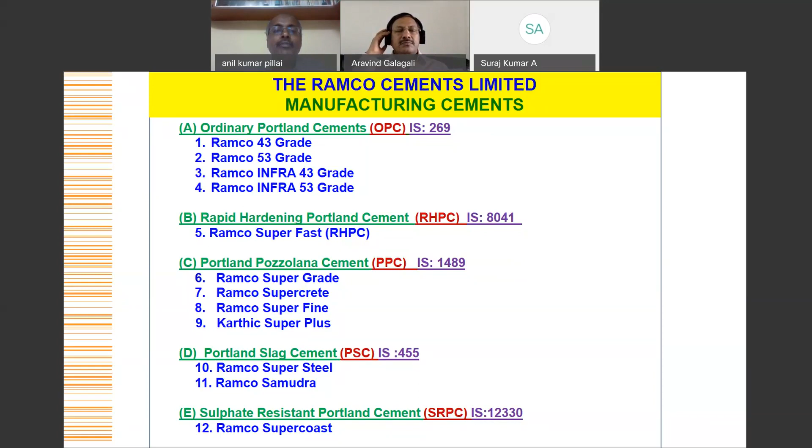So we do not recommend one type of cement alone. It is not that if we manufacture PPC or PSC, we just recommend that type of cement - it is not like that. It is based on the requirement of concrete that we recommend cement, and that is very important, because that needs to be followed from an engineering perspective as well. So these are the various brands of cement which I had already mentioned, the 12 varieties of cement.

And we also have the dry mix range of products for non-structural applications. If you want to fix tiles, we have the tile fix, the block fix, the super plaster, the super fine, and the tile grout.

So these are the dry mix products which are coming from our dry mix plant, established in collaboration with MTech Germany. Now, to understand customer requirements from an engineering perspective, it is very important that we have a research center. So we have Ramco Research and Development Center, where we have various equipment for checking the durability, the strength, and various fine parameters of cement as well as concrete.

We have the mercury intrusion porosimeter, the X-ray diffractometer, which are useful from a research point of view. So many colleges and prestigious institutions who want a second opinion about concrete and cement come to us and ask for studies to be done on those samples. So this is one thing we have been able to do at Ramco Research Development Center.

The organization has been able to get the 4 Leaves Award for leadership in technology and environmental practices. Some of our customers include ITD Cementation, L&T, Haldia Cement Authority, Haldia Development Authority, metro projects - our cement is approved for these.

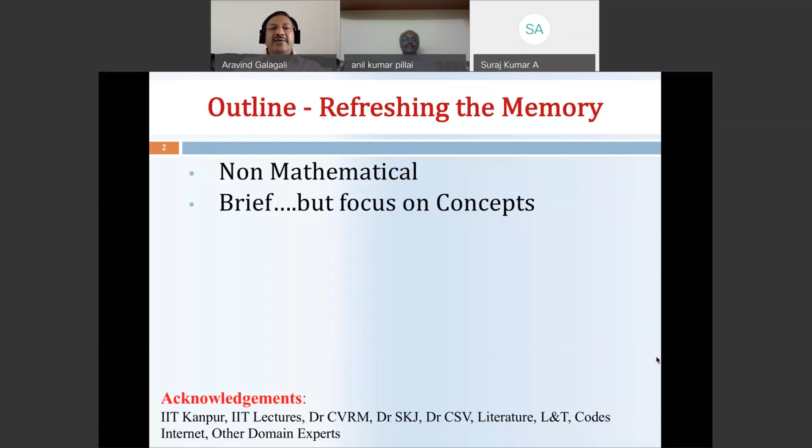But in the process, I would not fail to touch upon the very important concepts which you need to take forward in your day-to-day life, as well as in your consultancy projects, designing buildings and infrastructure projects. So I'll touch briefly on the concepts which have led to structural failures - this will be useful for students and consulting engineers practicing in the field. My focus will be on highlighting these concepts, and we'll try to understand why structures fail, what the reasons are, and if they are failing, who is responsible, and how much each one is responsible for the failure of the structures.

And if it's not within our purview, then probably we don't have to really be bothered about it. But by the time we reach the end of the lecture, you would know who is responsible and to what extent one is responsible in the entire domain of structural engineering. So in a couple of slides at the end, I'll touch upon the learnings we should take away in understanding structural failures.

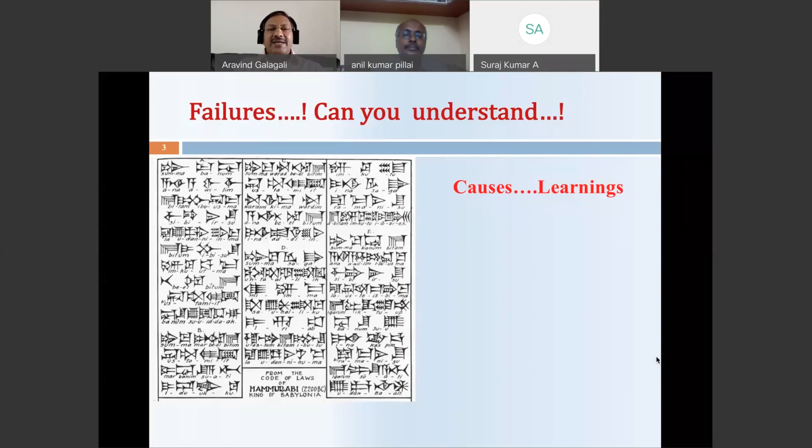So this is how the understanding of the failure is - is it like blind people touching the elephant, or can we truly understand, which will become more clear once we go to the following slides, whether the structures and the failures are understandable.

And if yes, how do you understand, and how do you learn after understanding the reasons for these failures? Once we talk about failure, I'd like to refresh your memory about the famous definition. Failure is not exactly what you think - a total collapse of the structure down to the ground. It is not always true that failure means a complete collapse.

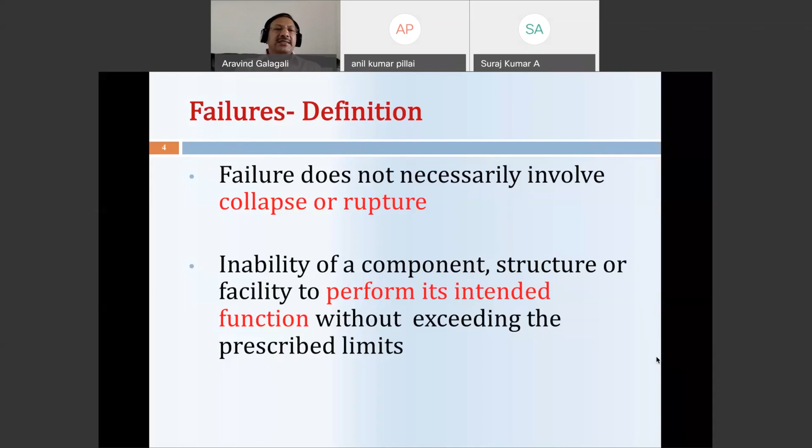Now, to learn from failures, let us quickly look through some past failures in history. Unless we look back, we will not be able to learn from the past. These are some failures available in the public domain, and I'm highlighting the reasons to bring to your attention - how structures fail, where we failed to learn from them, and how those failures can be technically interpreted.

Let us see the famous failures. I've taken these not in chronological order - earlier ones or later ones - it's just a combination of some historic failures.

One of the earliest failures, still popular today, is the Leaning Tower of Pisa, constructed in 1173. That was one of the first failures that engineers in the field understood. The total height of the structure is 60 meters, diameter approximately 20 meters, and it is tilted right now by 5.5 degrees, with the inclination increasing every year by a fraction of a millimeter. Field engineers, geotechnical and structural engineers are still trying to understand the reason and how to arrest this failure.

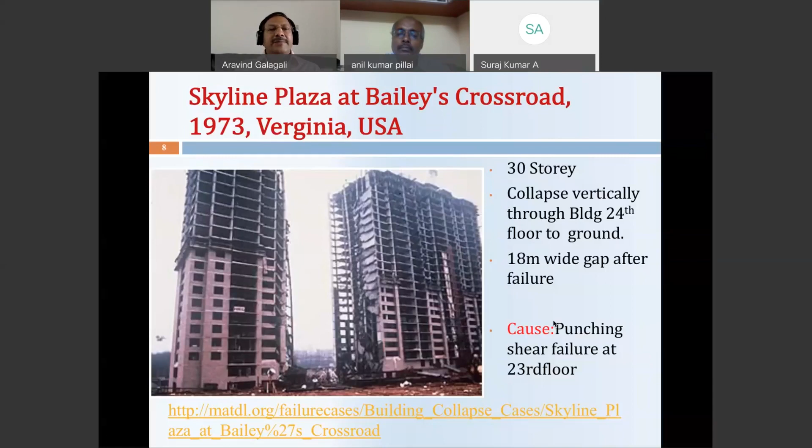These figures and failures bring to your notice how a structure can fail, and what are the different modes in which a structure can fail. What we learn from this is most important.

The other thing we learn in engineering is that large masses should not be at the top of the building. It is not that it absolutely should not be—I want to tell all the listeners, practicing engineers, and particularly students, once you see these failures and I say large masses should not be at the top, you should not get me wrong.

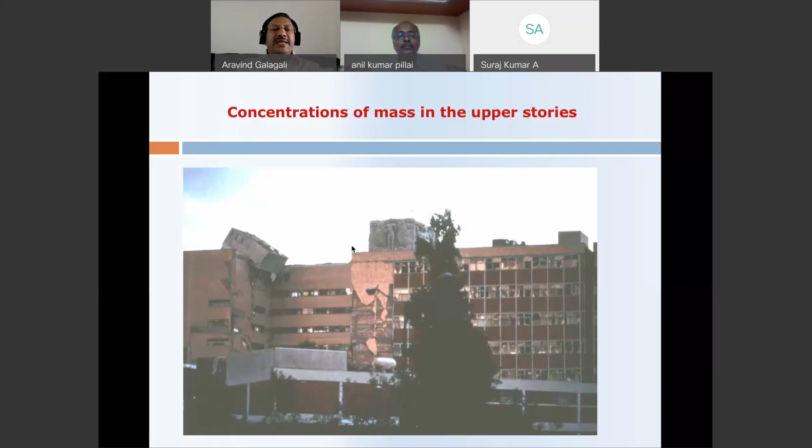So once you do design, you should be very careful in projecting such heavy masses at the rooftops. You could see some of the things which were failing on the ground, but even structures within the water are also failing.

Now, in the 19th century, there was a very important bridge failure—the Tay Bridge failure—and a lot of learnings happened from this bridge failure, which was completed in 1878, though it started about a decade earlier. There were 85 simply supported spans.

The failure occurred when there was a huge storm, and the structure collapsed. That triggered important thinking in the engineering domain—that there was an underestimation of the wind load. The cause of the failure was identified as the underestimation of wind load. So wind led to this failure, and people started working very aggressively on how a structure can be designed under wind loads.

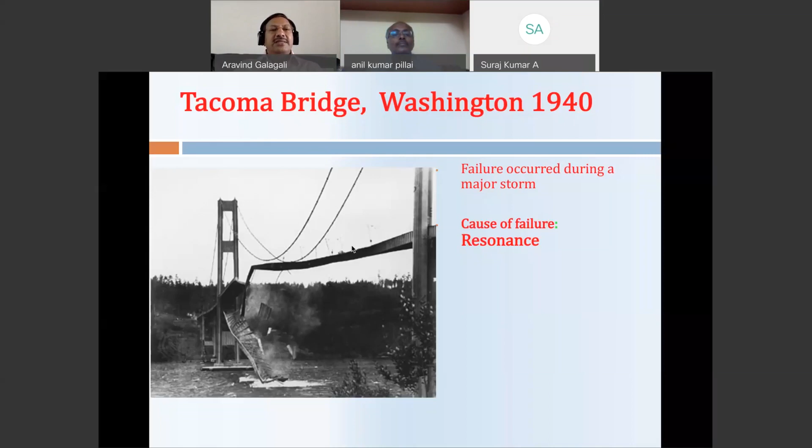One interesting thing is that a photographer was doing photography there, and when the structure started vibrating he could focus his attention and capture video, which has given important inputs for structural engineers to understand the behavior of bridges under dynamic loading and the reasons for resonance. So this is what triggered the thinking process in 1940 through the failure of the Tacoma Narrows Bridge.

Imagine, these days there are a lot of shelters during construction, and workers stay just below the construction site. If something like this happens, it leads to devastation and the killing of a lot of people. So you should be very careful in designing infrastructure projects when they experience dynamic loads.

This is one of the failures in India at Panaji. Some of you from Goa can recognize this is on the Mandavi river, and surprisingly this bridge collapsed three times. Once it collapsed, they redid it, then a second time, a third time, and finally they built it properly into a safe structure. But what you need to understand is how the failure happened here.

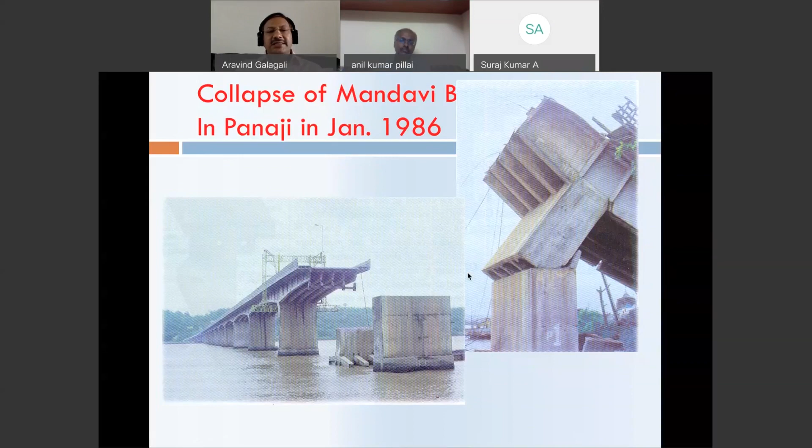The superstructure totally collapsed and fell into the Mandavi River. This is another view of the pier failure, the superstructure failure. The point to note is the repetition of failures at the same site. Why did this happen, what are the reasons, and what did we learn?

Probably all of you are aware of this picture from Shanghai, a building that failed in 2009. I'm showing this for completeness, because the failure of a structure is not only connected to structural engineering, it also has something to do with geotechnical engineering. This is a peculiar failure due to inadequate understanding of the soil and inadequate design of the foundation.

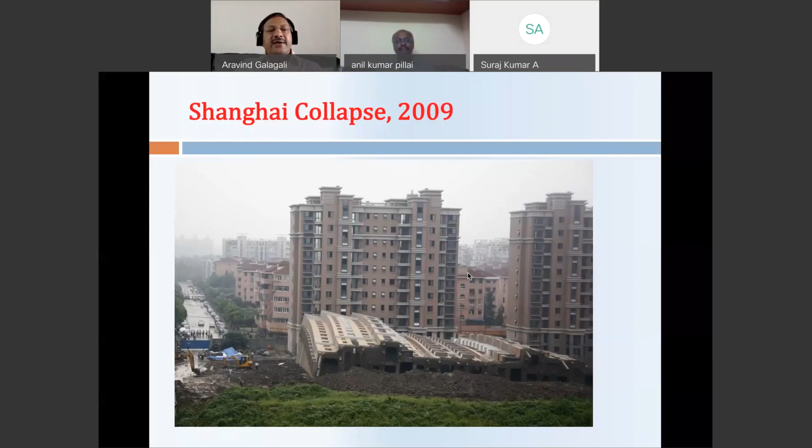In spite of going for deep foundations like piles, they came off like this. A lot of learning happened after this 2009 failure, about the reasons, the site effect on the design of the structure, and how such buildings behave under lateral loads.

Why I'm showing you all this is, later in a few slides, you would understand the reason. This is a soft lower floor collapse. You would see what that soft story is. It may be a known thing for people of high academic repute and experienced practicing engineers, but for the sake of students and practicing engineers, you can understand what a soft story is and how a structure can collapse.

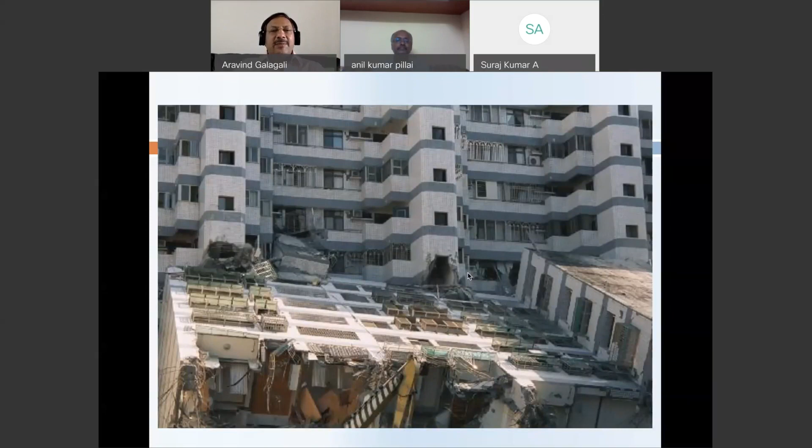This is another failure of a building. You can see the other portion which was standing intact, while only the front portion is failing. What you need to understand is, don't be under the impression that all structures tend to fail. No, some are failing, some are not failing, and you would understand the reasons and who is responsible.

This is, I'll quickly go through, the flyover failure at Hyderabad, which is a typical case of geotechnical failure. This is one view of the failure. Just see the picture, I'll quickly go through. This is a failure, and the top structure has also come down. You can see there is a tower during the centering portion. This is the portion which got collapsed, and this is a typical case of geotechnical failure, because you can see the pedestal.

Probably you must have seen in previous presentations also that it was resting partly - the supporting, the shuttering, or these things used for the superstructure, were resting on a pedestal. This pedestal was partly on filled soil and partly on strong soil, which led to the failure of the support structure, and because of that, the entire structure collapsed.

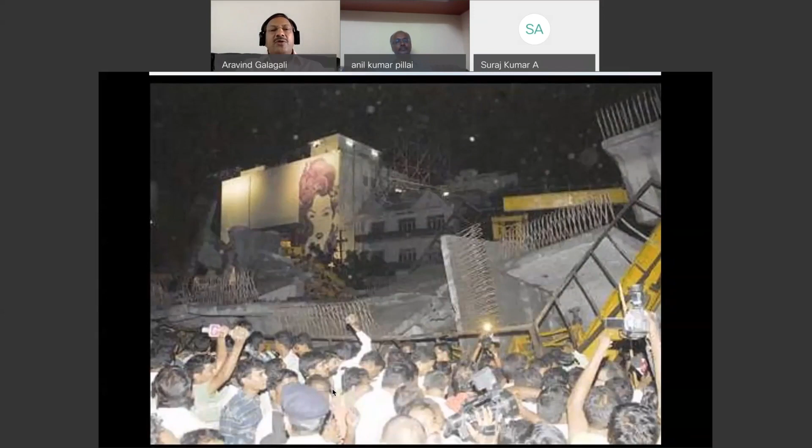There was a lot of hue and cry, and you can see a lot of people who got entrapped below the debris, and a lot of vehicles got entrapped between the failure of the centering and supports. This is what you must have seen on television. These are some of the pictures, and people died and were rushing to the hospital.

Why I'm showing you all this is just to bring to your notice that failure can be disastrous if we don't try to learn from past failures, and that's the reason why I'm showing you all these pictures. Some things also can be due to lack of supervision.

I'll just show a few structures. You can see again an important infrastructure project. You can see here, particularly the pedestal height - this pedestal height is different, there is a pedestal height is different, this is the pedestal height is different. Is it because of improper construction or improper supervision?

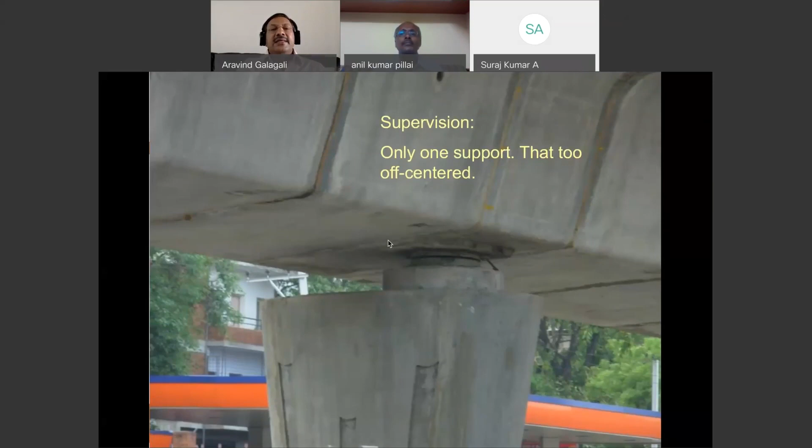More particularly, when an infrastructure project is built like this, can you afford to have negligence during construction? You can see here the missing support, another bearing and another pedestal coming on the other side, and the entire structure is supported eccentrically, which is highly vulnerable for failure. These are some pictures from the infrastructure project, the flyover project.

You can see this is on a turn here, and you can see the support missing here. You should not justify that it is on the curve, hence this side is missing because of the super elevation etc. If that is the case, you can see here there are two supports and one is missing. Do you think it is a design error, a supervision error, or a construction error? What I'm trying to show you is who is responsible, and to what extent, and the failures have been happening because of various reasons - what you can learn from some of these structures.

Again, I'll take you to the Delhi Metro collapse, which happened in 2008, October 19. You can see the superstructure got collapsed. The contractor, one of the famous contractors - you can see this failure - people got trapped and a few people died also. You can see the failure of this.

See here again, in 2008, there was a collapse in Delhi Metro, and before they could complete the project, again in 2009 there was another accident. Now see, why I'm showing you this is that the failures are repeating. Why did we not make an effort to prevent recurrence of these failures? Why we did not learn is the message I'm trying to send you through this series of failures happening repeatedly in our day-to-day life.

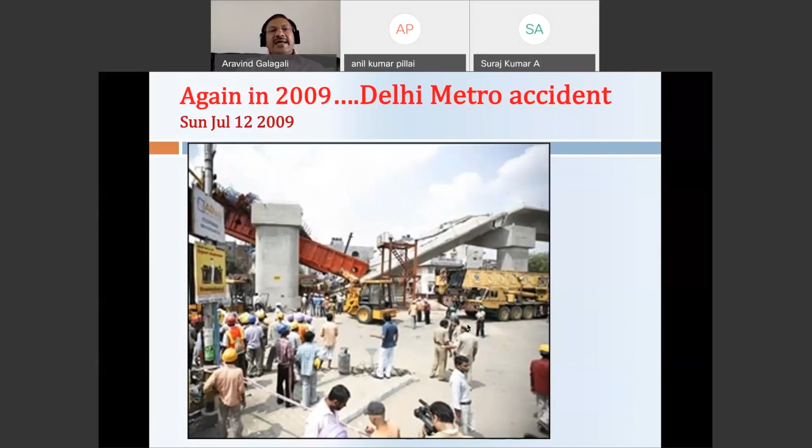And this is another view of the Delhi Metro collapse. See, in 2008, 2009, and again in 2010, this is a bridge collapse in Commonwealth.

Probably you must have seen on television that there is a bridge here, and it got collapsed again in Delhi, again in 2010, subsequently 9, 10, 8. So you need to notice that failures are happening repeatedly, and what are the reasons why we are not learning and improving. This is another view of the Commonwealth bridge failure.

And this is another typical failure in Chandoli. You can see the pier cap failure. You need to understand whether it is the failure due to the superimposed load, inferior design, or inferior detailing, because the bars which are to be on the top of it may not be able to take the cantilever load. These are some of the points you need to look at once you design and construct your building.

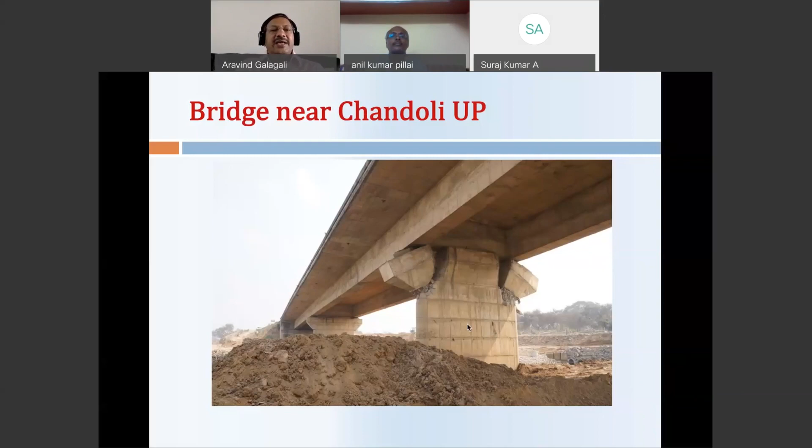This is a failure of the pier and superstructure, luckily intact because the diaphragm in between is supported on the central portion, which has not yet failed. So this is the Chandoli bridge. This is another bridge, again in UP, the Basti bridge. You can see the superstructure, how it collapsed like this during the construction.

So buildings are failing, bridges are failing, piles are failing, foundations are failing, and failures are repeating. Point to note: the tall chimneys are also failing. Again, I'll draw your attention - one at Raipur, Chhattisgarh, failed in 2009. Another at Jhansi in UP in May 2010. Again, after a couple of months in July, there was a failure in Maharashtra. See the series of things, 8, 9, 10, 11 - same tall structure, same chimneys. Why are they failing? What are we doing? Why are we not learning from this?

And of course, this is a building failure. You can see only the lift tower or the staircase is standing, the rest of the building has collapsed under the Gujarat earthquake.

And maybe I'll show you some of the failures due to lateral loads from earthquakes, etc., from where we can learn, because structures give up under worst conditions. They have the capacity to digest mistakes done by us up to a certain extent, but when it goes beyond, it gives up, leading to the failure.

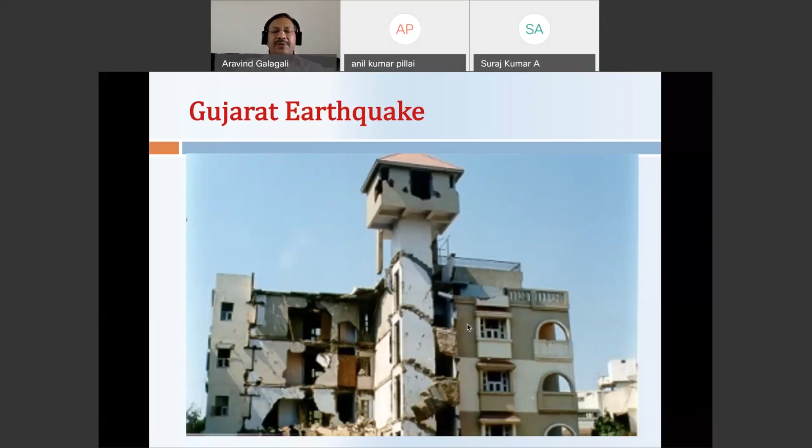Some of the people from Karnataka probably remember the Bellary collapse, and you can see here the upper floor - this is not the ground floor. The ground floor has already collapsed, and this is the first floor which has come down to almost ground level. This is how things can collapse. You can see the reports on why it caused the failure, etc. So the structure failed here.

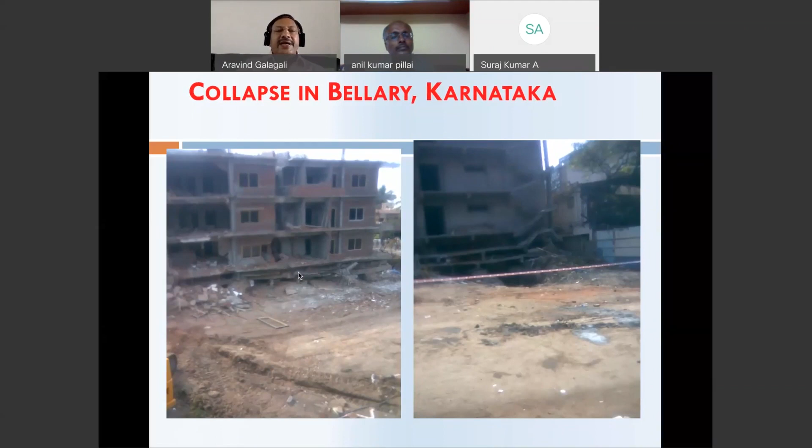Now, what are the triggers for these failures? Invariably we can think of the materials, the underestimation of load, or bad construction and bad supervision. There are many reasons for these failures, but primarily I would like to draw your attention to the loads, more particularly the lateral loads, because most structures fail under lateral loads caused by wind or earthquake. Our mistakes come to surface through failures once we don't design or detail our structure properly.

Earthquakes become very important because an earthquake is not a simple event - it has multiple repercussions. It causes the failure of the building leading to death of people, and it causes tsunami. The Sumatra tsunami was a very famous one that we still remember, and a lot of failures happened, and it leads to liquefaction of the soil.

What do you mean by liquefaction? Just to understand, soil becomes like water, and what you can see in this picture is the liquefaction of the soil. A structure resting on this kind of soil obviously fails because it loses its entire support at the base due to liquefaction.

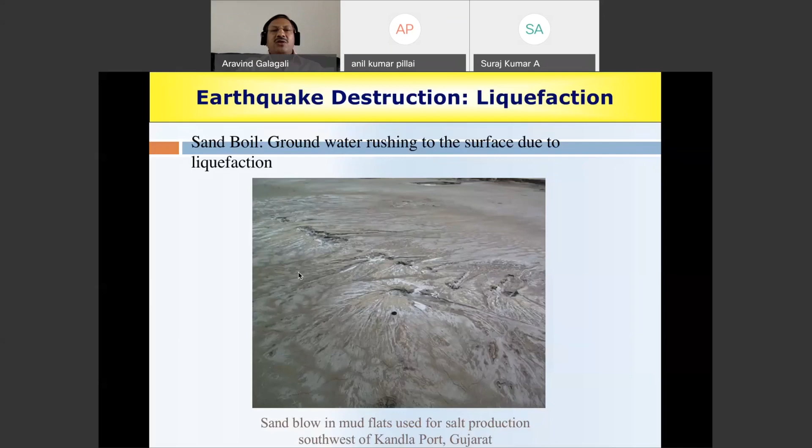Again, the cause is the earthquake, and earthquakes can also cause landslides, which can lead to failure. Earthquakes not only cause failure and landslides, but a lot of fires have also been triggered due to the earthquake itself, because of short circuiting during the earthquake and other reasons leading to fire failure due to an earthquake.

Another very important failure still in everybody's mind is the 9/11 World Trade Center collapse. Until that time, the codes did not account for this kind of loading, an aeroplane coming and hitting the structure. That is why I call this a code-exceeding load. So don't limit yourself only to the code. Codes exhibit the knowledge acquired over the last few decades till now, but these are surprises that can happen, enhancing our understanding of the likely loads that can lead to failure.

Don't think only a very tall structure can fail. I'm also trying to show you a small structure, even a pedestal on which Mahatma Gandhi is standing. This is from when we visited, along with Professor Sudhir Kumar Jain, the site of the 2001 Bhuj earthquake in Gujarat, that's why you can see the IITK photo there. What I'm trying to show in this picture is that even a small pedestal can fail if it is not properly designed. So you need not assume that only tall structures will fail.

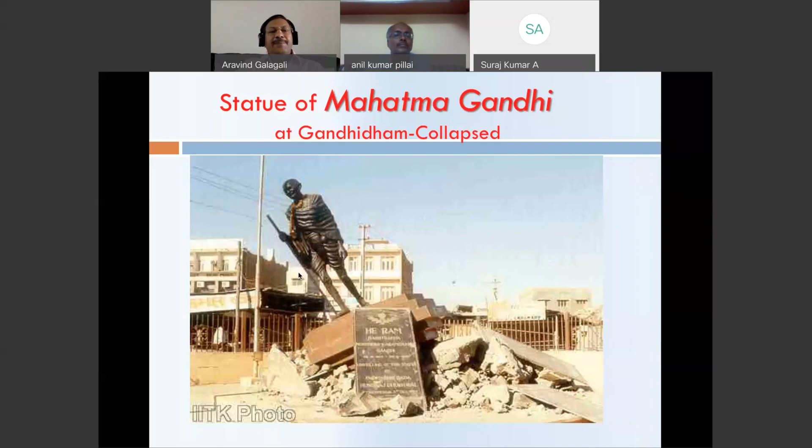Even a small bus stand, under lateral loads like an earthquake, can fail if you don't engineer it properly. That is an underlining point you should always remember.

So why do failures happen? Is there a proper design procedure? Let me quickly refresh your memory on structural engineering design. We need an accurate estimation of the loads - gravity, earthquake, wind, waves, snow, etc. - and even some loads not listed in the codes as of today. It is our mandate to consider and accurately estimate these loads.

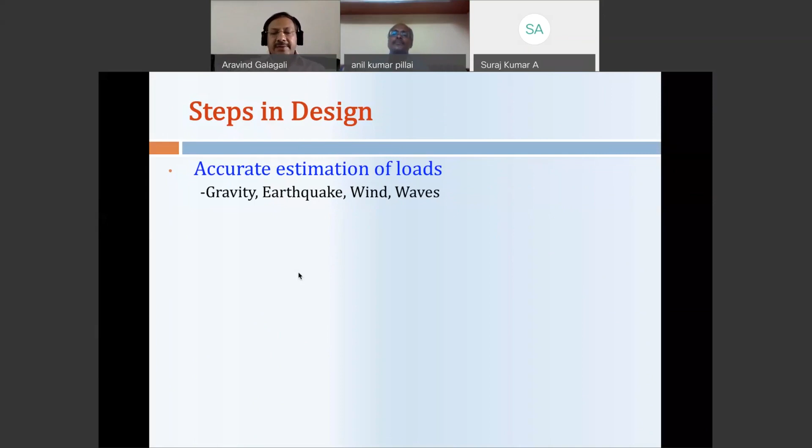That is the first step. Once the loads are estimated and acting on the structure, we need to estimate the structural response. Today we have lots of software available, so there should not be any difficulty, from simplistic modeling to very complex modeling and analysis, helped through computer tools.

Once we understand the loads and the response, we fix the sizes of the structural elements based on the material chosen - steel, RCC, or masonry, whatever it is. Then we check the structural response again after sizing.

We check whether there are any exceeding limits on the stresses, whether the structure is behaving elastically, because most structures are not always elastic - they are likely to go into an inelastic region many times, particularly under earthquakes and other dynamic loading. So we need to estimate and recheck the deformations, whether they are within permissible limits, so the structure continues to be functional, meeting its intended use.

So this is what we do: estimate the loads, the response, sizing, and cross-check the response. Then detail the structure and send it to the field for execution. Our intention should be that the detailing is very properly done. And how do we do this? Who helps us in estimation of the loads and sizing of the members?

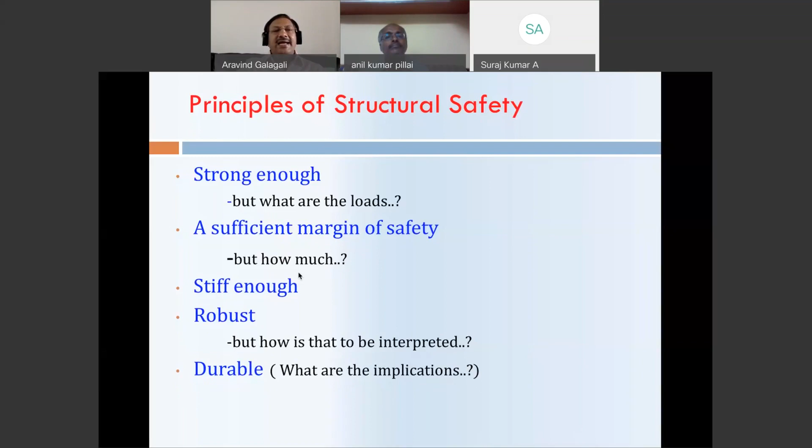So how are you going to really understand the energy absorbing capacity of a structure? How do you really make a structure robust? How do you make a structure durable? What are the provisions, the direct ways in which you can make the structure durable? You should be attending all these questions if you really want to make a safe structural design.

Then modes of failures, and there are different modes. If the structure fails, I want it to fail in a particular way. Of course I don't want the structure to fail, but you can have an inevitable situation. If it fails, let it fail in a controlled fashion, in controlled modes. And before failure, I want my structure to give enough warning so that I can save my life. These are some of the principles you should always be thinking once you design your structure.

And what is the service life? What the code says about the service life is still a question mark. How should I design my structure and how many years it should be safe, whether 50 years or 100 years - all these things have certain codal provisions. So all these uncertainties are addressed through excellent codes. We have excellent standards to understand and address all the previous thoughts to make a structure safe.

But in spite of this, why are we facing all these problems? We have excellent codes in different BIS, IRC, national, international - different countries have different codes. We have excellent analysis and design tools, quality materials. Steel and concrete are excellently produced in the factory with appropriate quality controls. Then we have enough detailing tools.

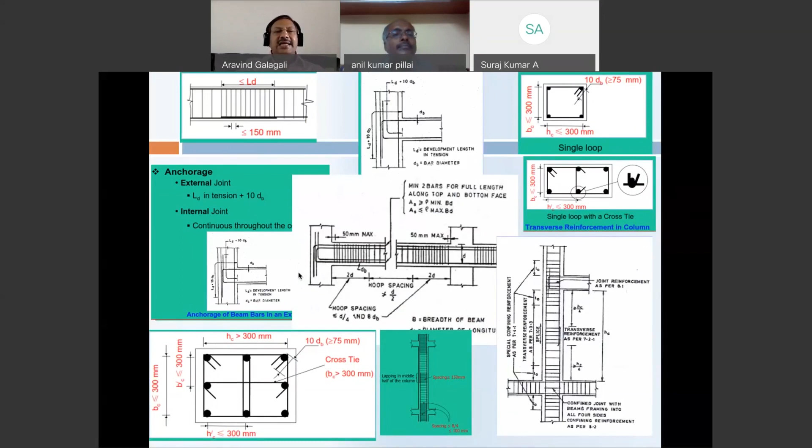I'm just showing you the guidelines, the codes, detailing etc. You are all familiar - I'm just showing a complex view, picture over picture, just to refresh your memory. You can always go back to different codes and look into design loading standards, design standards, detailing standards etc. But in spite of this, why do structures fail?

Why are they recurring? Are we not learning from our past experience? And what is the missing link? When you have such excellent tools, good materials, everything, but still they are repeating, that makes us feel there is some missing link due to which the failures are happening repeatedly.

Can we afford these failures? Definitely not, because the loss of life, loss of property, loss of infrastructure will lead to a final economic loss to the country, the society, and the humanity at large. So now you cannot afford to ignore these failures.

Now I will take you through how severe it is. Can I afford to ignore? What is the vulnerability? I'll show you the vulnerability map available in the codes - what you can notice is 60% of our country is prone to earthquake hazards, 16% for drought, 12% for floods, 8% for hurricane and wind, and 3% for landslides.

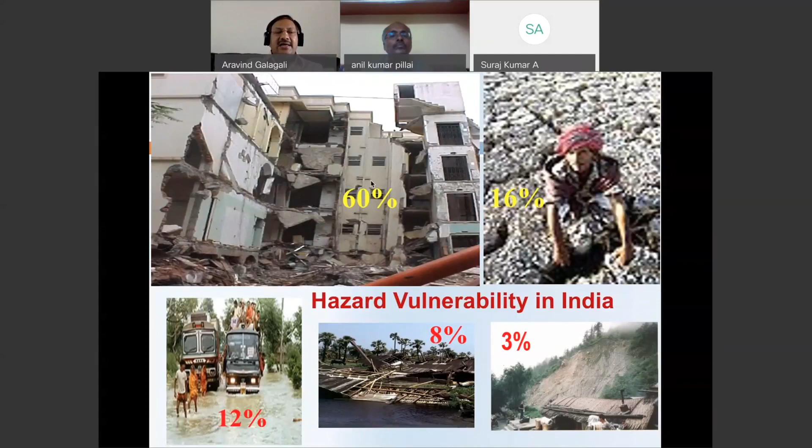So what you need to notice is the major contribution, the major cause, the major trigger is here, which has something to do with our engineering fraternity. Of course all other things are also connected to us, but I'd like to draw your attention to this important trigger - an earthquake or a lateral load or a dynamic load - which has a vulnerability as high as 60%.

You can see a lot of earthquakes which have happened in the past, and these are available on the net. But what you need to notice here is, in addition to the infrastructure loss, we have lost human lives to an extent of a few lakhs. You can see here, the Indian Ocean 2004 tsunami, the Sumatra tsunami, has caused loss of life of more than 3 lakhs.

You can understand the loss of life under these man-made structures, which are very important, and that's the reason why we need to really address this.

This is one famous earthquake that happened in 2001 on the 26th of January, when the flag hoisting was about to happen in the morning, and suddenly there were tremors, not only in Gujarat, but the repercussions - the news created a tremor across the globe. There was a 6.9 Richter scale collapse, leading to a huge loss of life. More than 20,000 people lost their lives in the Kutch and Bhuj areas.

What you need to understand is the damage to structures happened due to earthquakes, not necessarily in one kind of structure. Why I'm showing you all this is that anything can fail, even masonry structures can fail. You can see a simple structure which failed in Gujarat, Kutch, Bhuj, and also in the Killari earthquake of Latur. What you can see there is a small masonry structure which also got failed. So masonry structures can fail, small structures can fail, and this is another view of that.

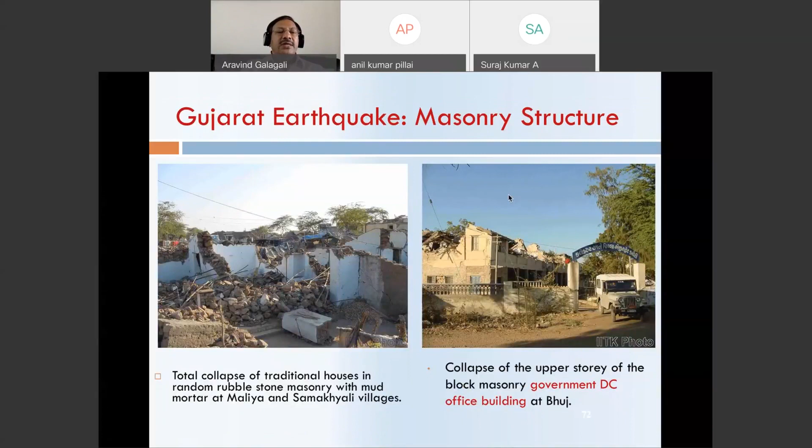And this is random rubble masonry. What you can see is the failure under lateral loads. And you can see this masonry structure, a simple ground floor, stone masonry, and a slab over that. Because it is an RCC slab, a portion of that is still standing, but you can see this wall.

And this is again a masonry structure, but unfortunately there are no lintel bands, which has caused the cracks. So you can see the importance of the lintel bands which you should be providing. So small structures can fail, large can fail, masonry can fail.

And now let's see an RCC structure. This is one of the 10-story buildings which got collapsed. On the right side, what you can see is the staircase is still standing, but it got detached from the rest of the building. So RCC structures can fail under the loading.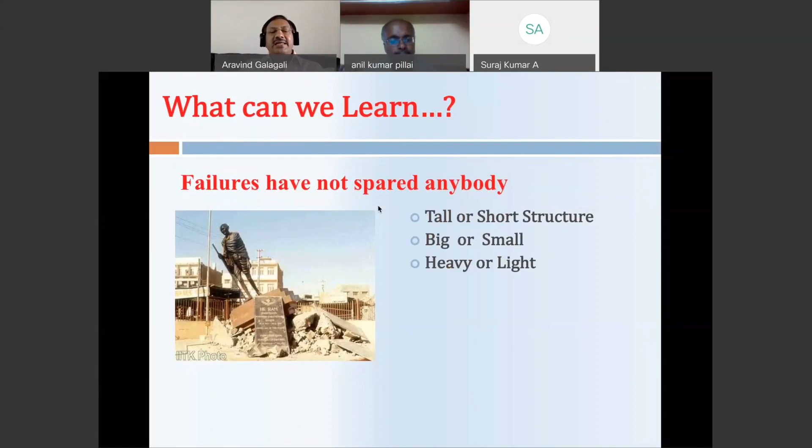And now, looking at the previous things, what can we learn? My point in today's presentation is what we learn from the failures. Some of the failures teach us that tall structures can fail, short structures can fail, big or small, heavy or light. You could see some structures which were very heavy, or some small, or some light. So all are subject to failures.

Important or minor structures, all are prone to failure. So what you need to understand is failures are happening in every kind, every walk of life, if and only if we don't do our duty. And whether we are doing our duty, whether we are doing justice to our profession, is what I am showing you in the next couple of slides. I'll have to rush a little fast.

Even government buildings are not spared, temples are not spared. So all these failures can touch anybody and everybody. Even a great soul, Mahatma Gandhi's statue, what you can see on the left side, is also not spared from the failures. So this is what you learn from the failures.

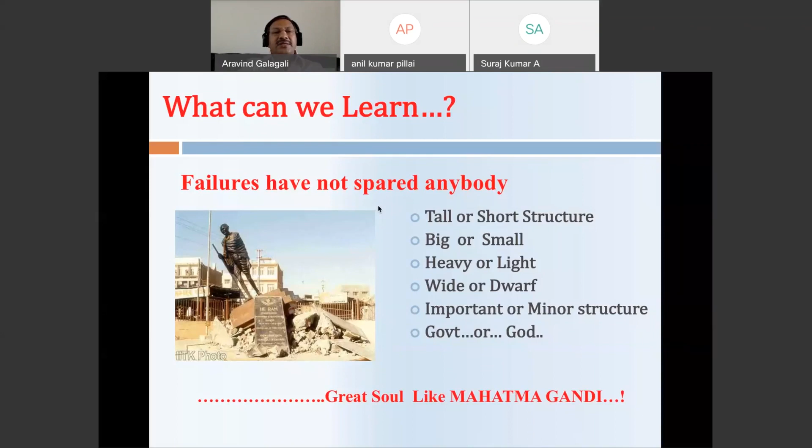Now, who is responsible? Let us see this. Obviously, you should not be under the impression that all structures will have a vulnerability of failure. No, all structures need not fail. And if some are failing and some are not failing, then who is responsible? That is the question you need to be asking.

In the same area, I'm showing you these examples from the same area where some of the failures you saw in the previous slides occurred, these are perfect structures which are still standing under the same earthquake load they experienced. So what you need to understand is failures happen if structures are not properly designed, that is the message and learning. You can see this tall structure, chimney and cooling tower, still standing very well. All of them performed very well during the same earthquake, a good performance.

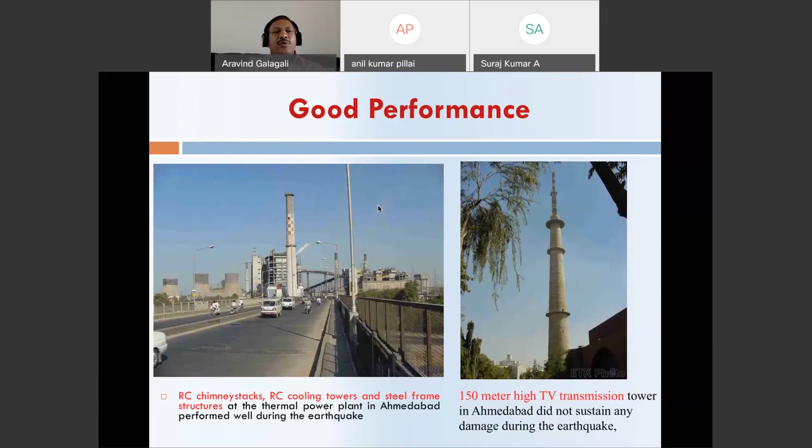And old structures, don't be under the impression that old structures got collapsed. This is a palace in Bhuj, a classic structure, and there is another temple. Some temples also did well. So what you try to understand is some structures failed and some did not fail. Then what is the cause? Who is responsible is the learning we should be pursuing. This is another structure which suffered minor cracks under the earthquake, fully intact, only the cladding suffered cracks.

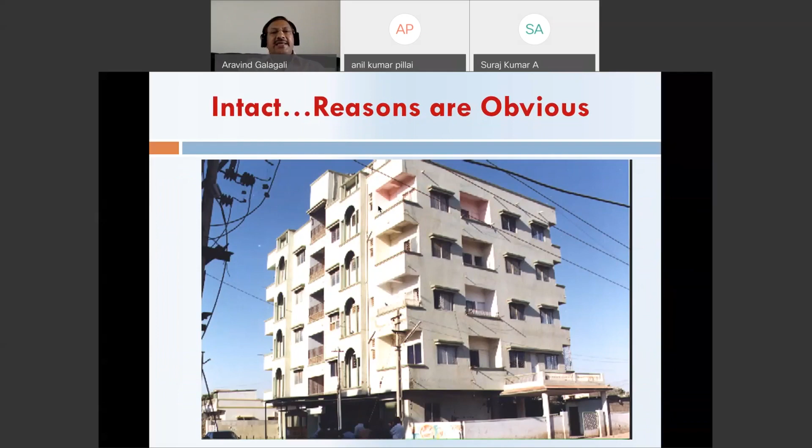You can see the main structure is still standing without causing major loss of life or property. This is a perfect building—nothing happened, not even minor cracks in these kinds of buildings in the same area. So what you should learn is only a few are failing, others are not. The reason lies in the engineering. See this typical structure: the front portion collapsed, while the other building in the backdrop is still standing, with only small damages to the cladding. Same area, same side—one is standing, other is failing.

Why? This is what you need to understand when the structure shows these surprises. What matters is engineering, design, and construction in creating failures or arresting them. So look back—who is responsible? Mother Earth, because she's creating the earthquake.

Government, architects, contractors, civil engineers, builders, municipalities, development authorities, masons and workers who are constructing, and the public at large. I leave this question to you—go back and recollect my previous slides, and a few more you're going to see, and then you should be able to answer who is responsible, and to what extent. I'll revisit the failures and try to understand them.

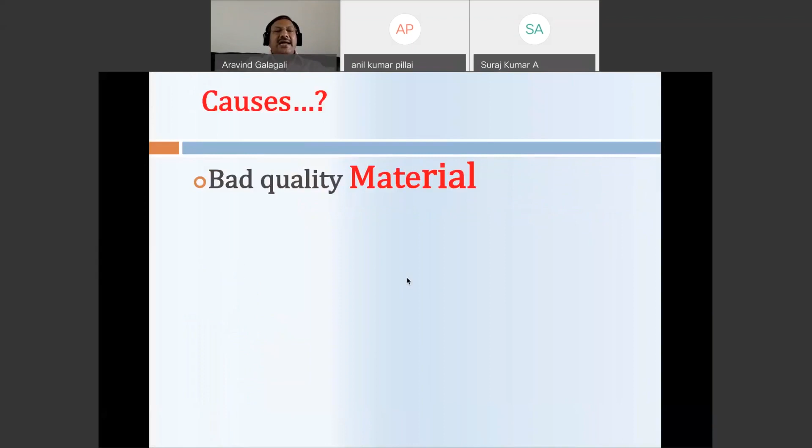Failures can be due to bad material, inadequate designing, improper detailing, bad construction, or poor maintenance—these are the major and predominant causes. What you need to understand is material failure is no longer a real factor, because all materials are fantastic these days, produced with a lot of care—there's no question of inferior material. The second is designing, because we have excellent tools, so that also should not be a problem, but there are small lacunas which I'm going to show you. The third is detailing, which people think is non-technical and unimportant, and which generally gets ignored in most engineering design and execution. The other reason could be bad construction and maintenance.

What you need to understand is materials are good, and maybe the reason for failure could be design or detailing. I will show you one of the surveys on who is contributing how much. And if the earthquake is the cause, we cannot afford to ignore it.

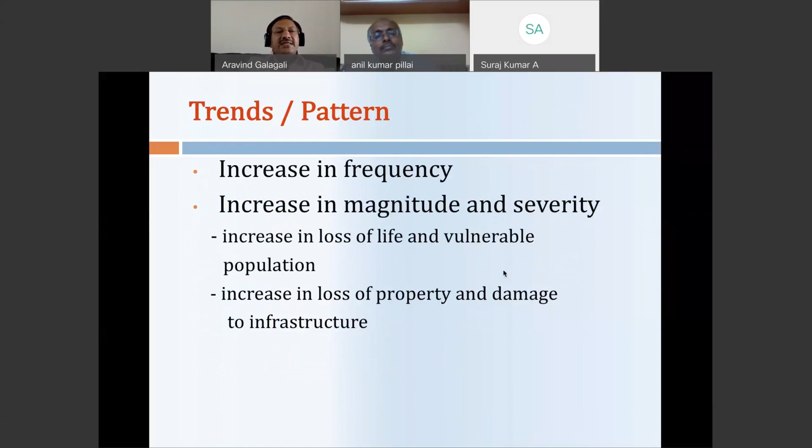The second concept you need to understand is that all structures will not behave elastically. If you want your structure to behave elastically—linear elastic—the force experienced is the actual earthquake force at this level. But should we design for this force? If I design for this high force to keep my structure linear elastic, the cost is going to be very high. So should I design such a costly structure? The answer could be no or yes, because why put such a huge amount of money into a structure to behave elastically for a very rare event? Earthquake return periods could be 50, 100, 500, or even 1,000 years—beyond my own lifespan. So why spend such a huge amount of money creating a structure to behave linear elastic?

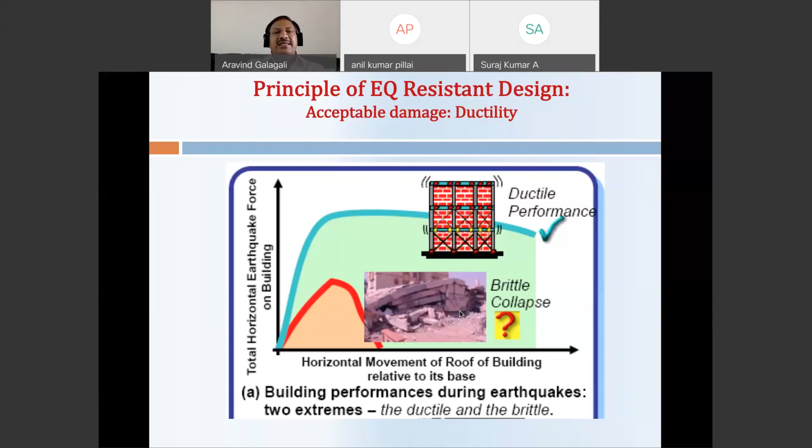I'm only touching on the concepts. The third concept is a very important thing you need to understand - as taught by Professor CVR Murthy and Professor Sudhir Kumar Jain during our course in earthquake engineering at IIT Kanpur: strong column and weak beam. This is a simple observation - your columns must be stronger than the beams. Any student or practicing engineer can understand this common principle.

What happens if the beams are stronger and the columns are weak? Then the columns fail first under loading, and if the columns fail, the entire structure collapses. So I don't want my columns to fail first. That is the reason why I make my columns strong, and I can afford to have weak beams. If the beam fails, the failure gets restricted to a particular floor. This is the concept that strong column, weak beam theory should be adopted in structural design. Whenever you see a building, you could get your first impression of whether the strong column, weak beam principle has been adopted or not.

If you don't do that, these are some of the failures you can see - strong beam and weak columns leading to failure on the left side. You can see this huge beam but a very small column - this is a ground plus 3 building. We inspected this building after it failed - you can see there's a strong beam and a weak column there. So what you need to understand is the structure will not hide your mistakes if you don't follow simple principles as guided by the codal provisions.

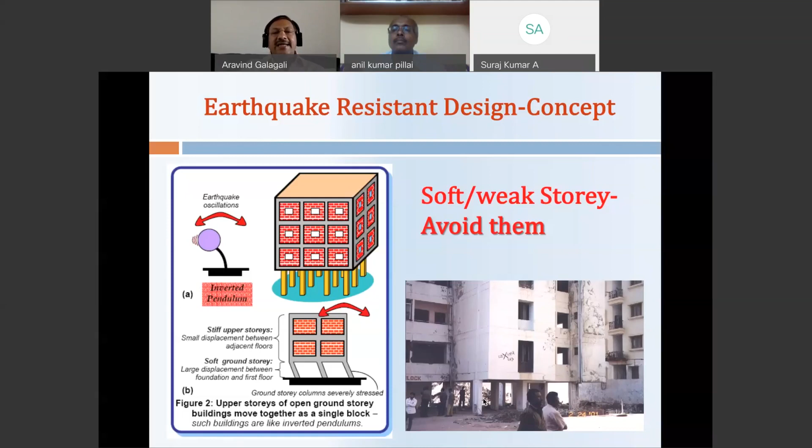And if you don't do that, these are the implications. You can see the lower floor collapse here, upper floors intact. This is again a lower floor, ground floor collapse, and the upper floors are still strong. Avoid or design, choice is yours.

The mistakes have come to surface during the crisis. And that is why good buildings survive the crisis. Only bad buildings, inferior designed building, non-engineered building may lead to failure during the crisis.

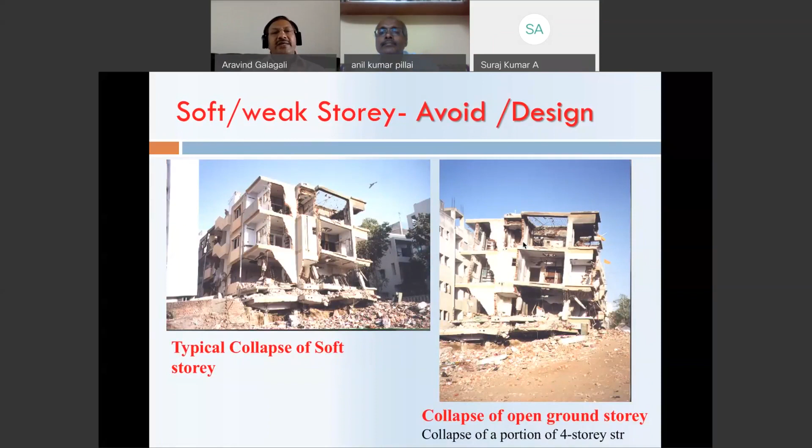And now with all these figures, again, you can go back and look and answer who is responsible. Is it the responsibility of the engineering fraternity, and the contractor also is a part of us? So who is responsible? What you need to always be touching.

Now, some survey. Why I'm showing this is who is contributing more. In one of the surveys, it says that the failure can happen due to various reasons like inferior material, bad design, bad maintenance, etc., or errors in calculation.

But the major contribution is failure, 78% of the failures are triggered due to poor detailing. This is a very important point what you should learn. So detailing is very important in addition to the design, what you could see in the previous slides.

In the following slides, I'll just quickly show because I'm nearing my time. In another 10 minutes, I should be able to wind up, and a few minutes, 1 or 2 questions can also be taken up at the end.

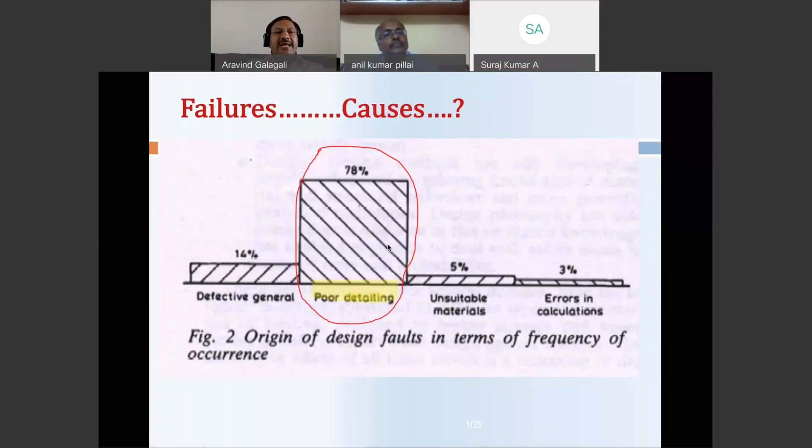So the detailing is very important. And if you ignore the detailing, what happens? Now I'll show you a very simple development length. There are many examples which I can show, but I only touch one point. A very simple development length, probably everyone would have studied at the first design class of an RCC structure.

And codes also say, and the important infrastructure failure at Delhi happened due to such a simple concept of the development length. Now you could see, you would appreciate in the following slide. This is taken from the failure analysis report submitted to the government by veterans in the field.

You can see this. This is the original proposal. This is a superstructure resting on a beam on 2 columns. And obviously what happens is, this was the original concept, but later, as you know, a lot of politicians, important properties create problem for execution of this.

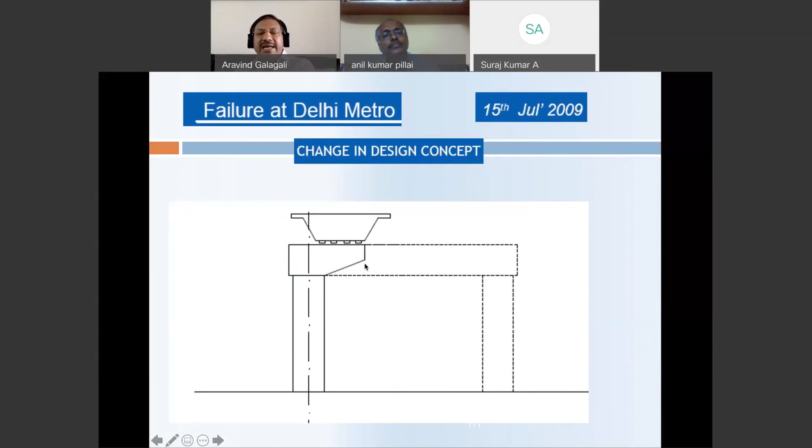And hence, this much portion was modified and there was a change in the design. They said, okay, let us not execute this portion, take only the cantilever portion and the rest the superstructure. So the design was modified in between during execution time, looking at site difficulties. There was a 4.5 meter cantilever to support the superstructure.

And the reason is, I'm showing you the same report that insufficient lap length in this cap showed some cracks. So obviously, once the cracks are visible, people become aware, and the work was stopped in Delhi Metro for a couple of months, and then they started giving obvious support.

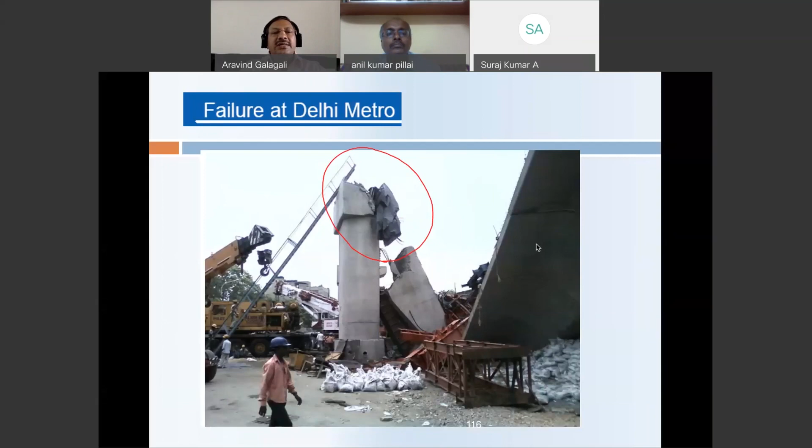And this is the failure of the pier cap, and the superstructure came down, and this was due to insufficient lap length, which was the reason for this. This lap length was inadequate, and that is the reason why you can see this. The bar which is coming from the top should have been taken sufficiently here, because earlier it was a simply supported beam, and the same thing probably must have been continued in detailing this, forgetting that this is a cantilever and load needs to be transmitted through this. Because of this reason, a simple development length was ignored, leading to a collapse of such an important structure.

Okay, quickly I'll show you some of the failures in columns due to tie shape, diameter, and lap length. This is available in the code. Again, Professor C.V.R. Murty gave an excellent explanation of this.

You can see this, the ties must be bent here like this. When you go to the site, particularly site engineers and students should observe that this should not be a 90-degree bend. It should be like this.

Why it is important is it helps in resisting the huge amount of axial force because it is going to confine the concrete, holding it tightly through this confinement so that the structure will not fail even under lateral loads and high axial loads.

This will also act as a support to the longitudinal steel in the columns so the columns will not buckle. These are the very important reasons for which proper ties must be provided. If you don't provide them, the structure fails.

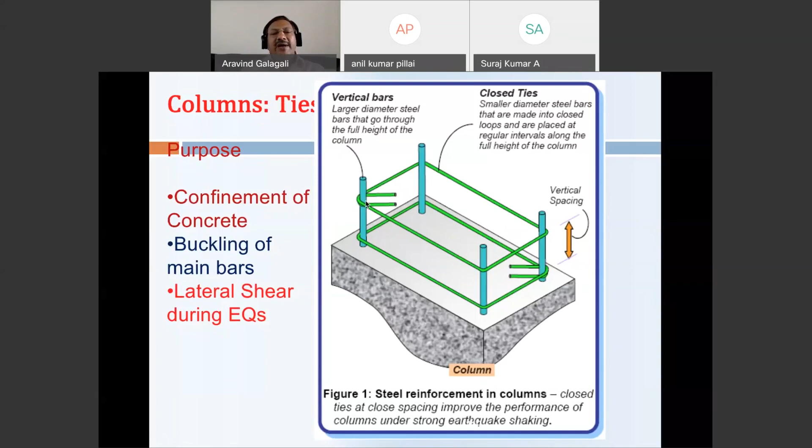Sometimes you need to provide links which are ignored, and we end up having only the long link. These two longitudinal bars are unsupported, and they behave very badly. So you need to have some links which you should observe.

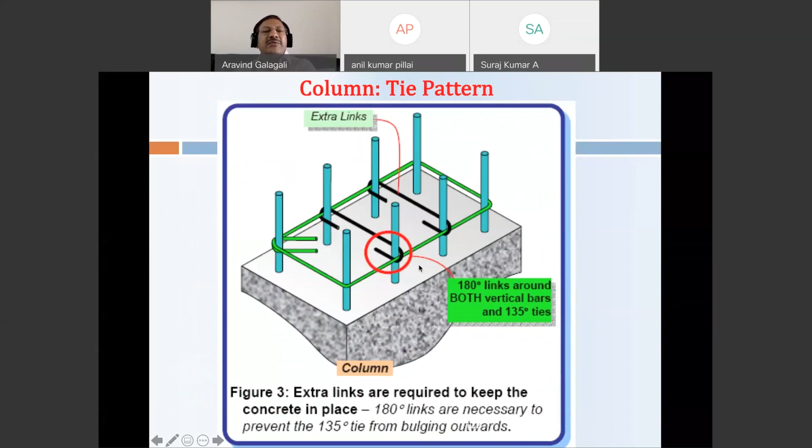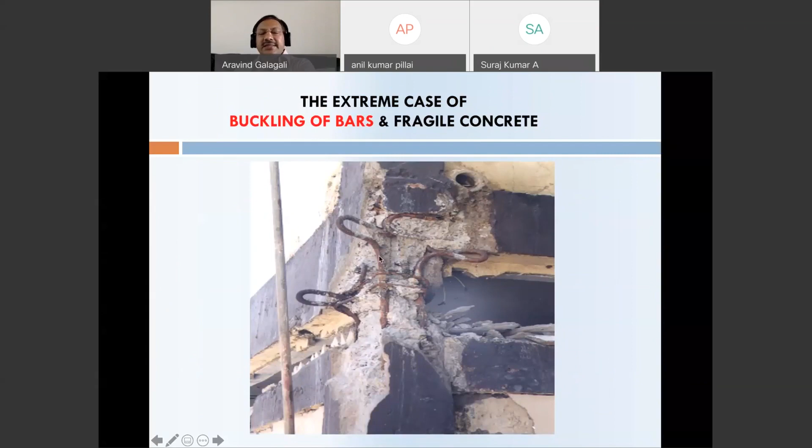This is a critical case of buckling of the longitudinal bars due to inadequate ties and links in the columns. Again, this is available in the codes and guidelines by Professor S.K. Jain and C.V.R. Murty sir, and earthquake tips.

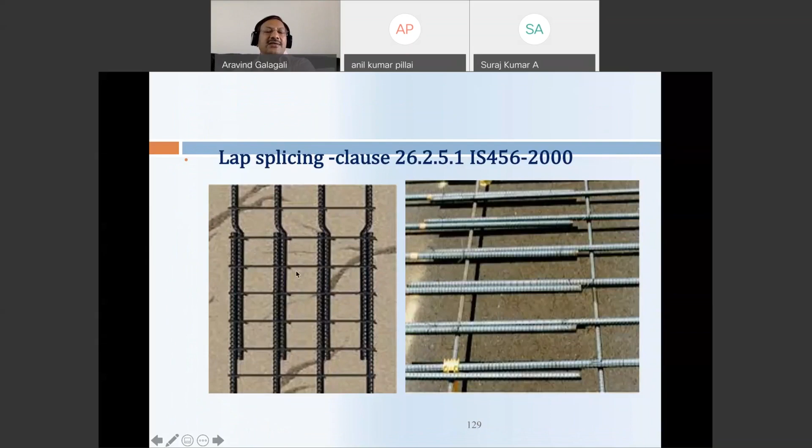But actually what happens in the field? Again, 100% lapping at one location has led to failure. So I'm showing you, if you ignore simple principles of detailing, they will not be concealed - the structure shows you through the failure. This is the learning of what you need to do.

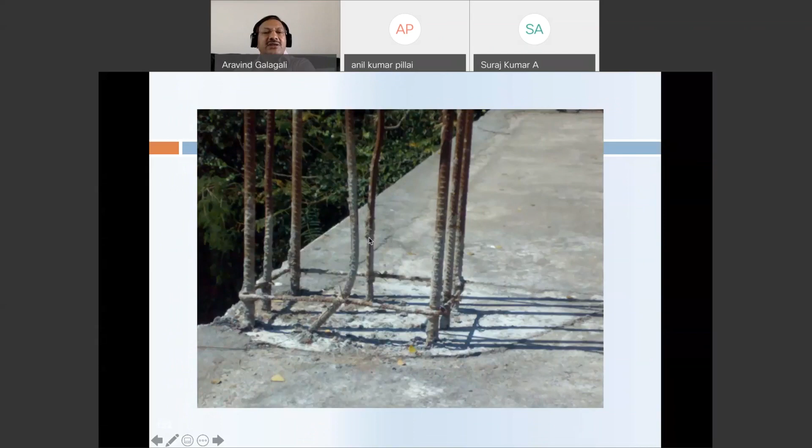The buckling, again the lapping at one place - structures can fail. Again, see in most cases we end up kinking bars like this, which is not good practice. For beams also, we have all these guidelines: closer stirrups and closer stirrups here.

Code 13920, the recent code, also addresses this. You can see this thing, and again the stirrups should be like this. But how many of us observe, when you go to the site, whether the links are bent like this and not at 90 degrees, closer here, and the development length should be taken like this.

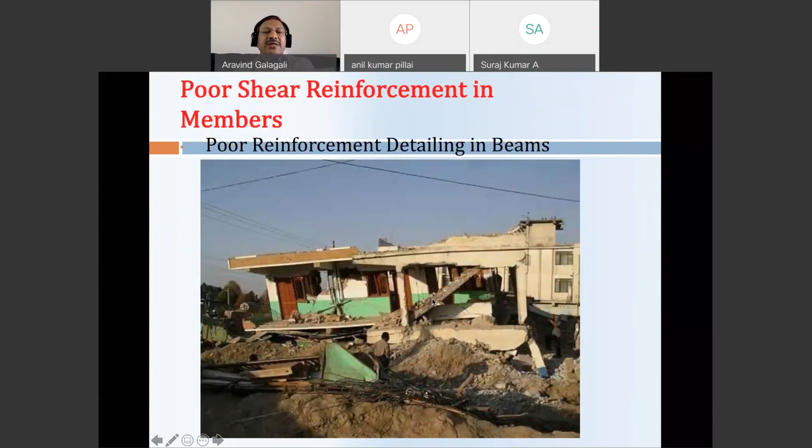And if you don't do this, what happens? This is one of the reasons for improper shear reinforcement. And look at that - is there any space for concreting here?

That's such heavy reinforcement, no space for concreting. This is the diameter of the bar. For ties, the code specifies the minimum diameter of the bar should be so and so. But look at this - it has come to the surface through failure because we did not follow simple codal provisions. You can see 90-degree hooks and just a connection, no development length. The column bars come and just touch the beam, so they will not survive the crisis - they lead to failure.

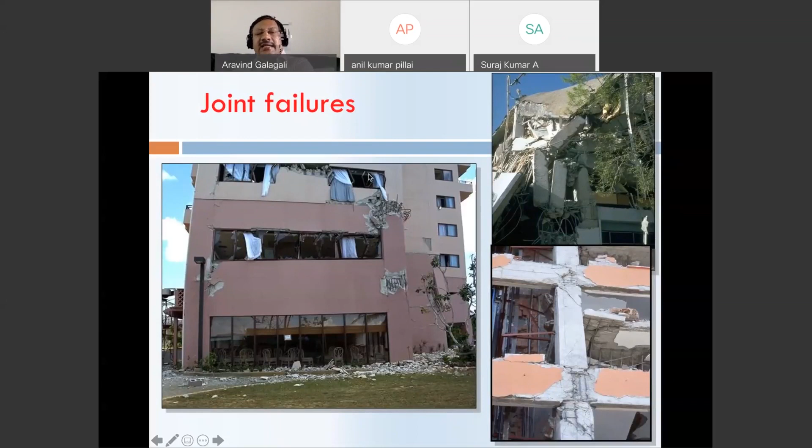An important thing you should observe at the site is the beam column joint, and joints will fail like this if you don't design them. Engineers generally get surprised if you ask them to design the joint, but they are very important. The joints also must be designed and properly detailed. If you don't do that, these are the failures.

These are the failures, look at that - there is no concrete at all at the joint. See here, once the shuttering is removed, there is no concreting. So joints have to be designed. This is the learning you need to take from these failures.

An important observation is this is a beam running horizontally, this is a column going vertically. But the stirrups come here and stand up to this face - this side from the beam stands up to this. Ties in the column stop here, again start here, but there are no ties at all, nor stirrups, in the central portion of the joint. This is very important, and that is the reason why you encounter failures if you don't provide the stirrups or ties here in the column.

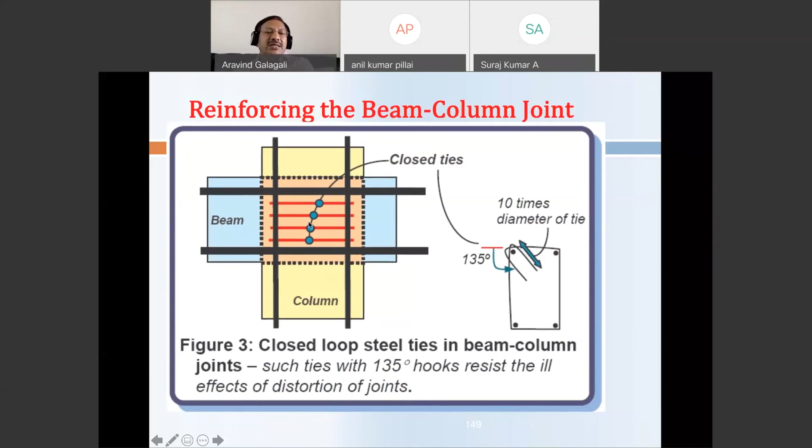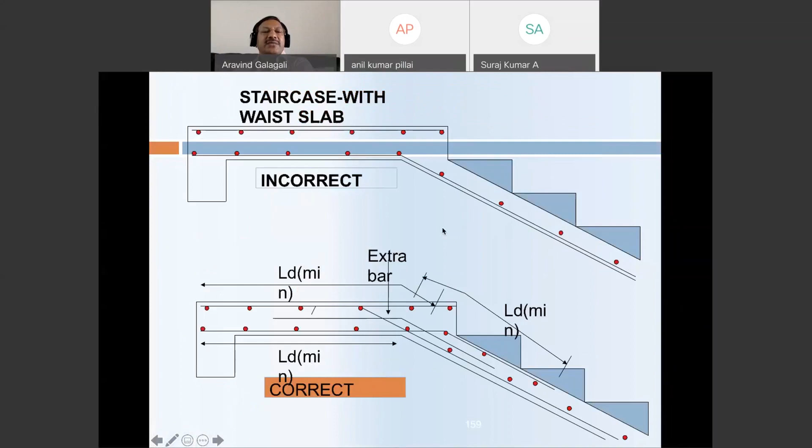And for slabs, I won't touch these - particularly cantilevers fail, and staircases also fail because of detailing. These are some of the views.

The next point you need to observe is floating columns - this is the order of the day. A lot of architects will come and tell you, 'oh, I don't want this column.' But as a structural engineer, you should be able to really understand what the load path is. Can I afford to remove those columns? If you want to remove them, you have to ensure a proper load path for transmission from the superstructure to the foundation - that is what you need to design.

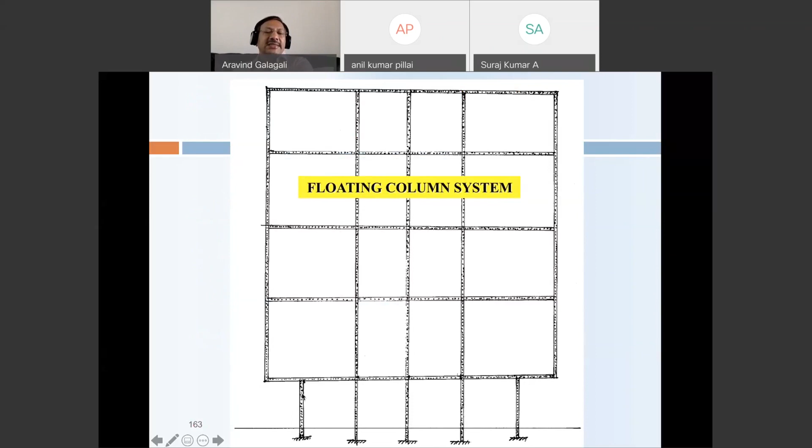I don't say it is impossible to avoid columns. So like this, the columns will be coming at the end, and suddenly it comes inside and goes like this - so the path becomes discontinuous. You have to design carefully for this portion. If you don't design, look at this - there is a column here somewhere in this, and there is no column continuity. These are all the practical possibilities you need to take care of. If you don't design, avoid doing this.

After realizing the elimination of columns arbitrarily, the structure started showing distress, and then they started adding a few columns as a repair. See, this looks very innovative design - one design has only one column, and the entire superstructure is resting on only that one column. It looks very innovative, and from the architect's point of view it is very creative, but from a structural point of view, you have to be cautious when designing these things.

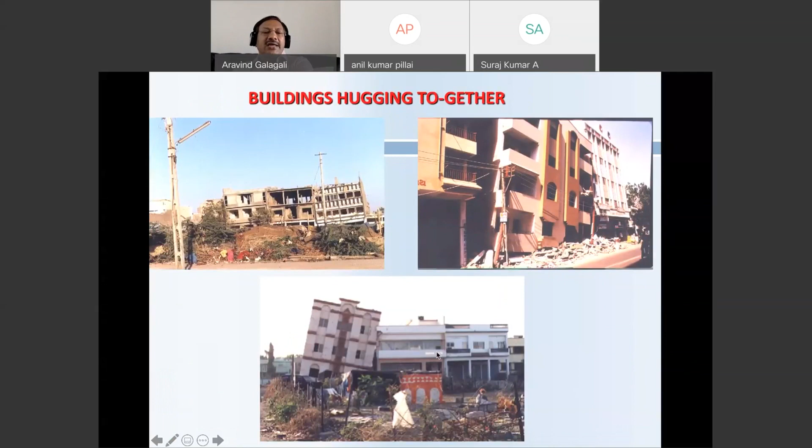And if you don't design, these are the failures - failures from designing buildings very close to each other. These show knocking or hugging of structures under lateral loads. Now, after seeing this, come back and look back at who is responsible for all these things.

So now you should be able to understand who is responsible. I leave that answer to you, and I'll show one or two slides from the quality.

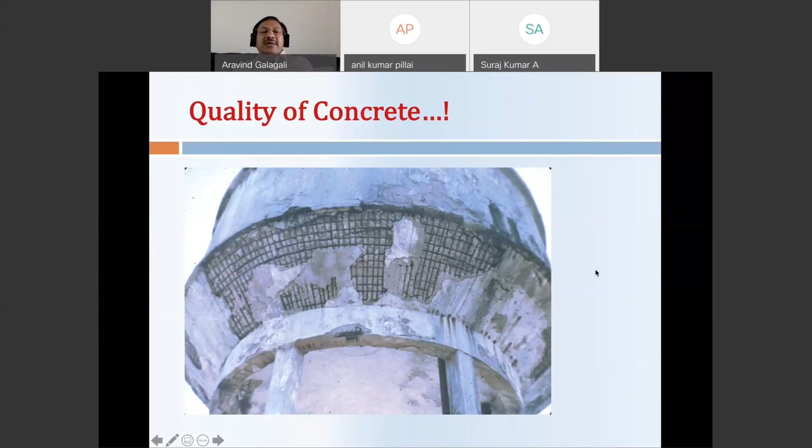This is another view of inferior quality concrete and corrosion. Look at the corrosion and spalling. This is how you should make the structure, and this is how you should not make it, which affects durability. The bad quality shows up here, and under lateral load, look at that, no aggregates, everything is made of fines. You can even scratch it with your nails.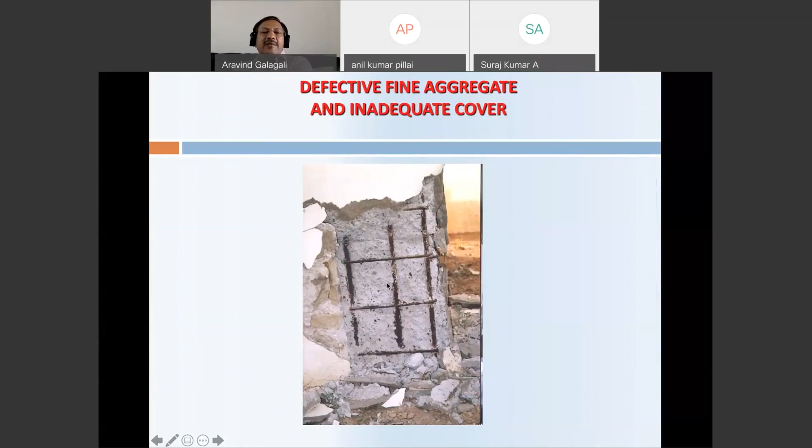Corrosion is also an important reason, due to bad maintenance. I'll not spend much time on this. These are some views you can see, the corrosion as well as buckling, due to no maintenance, etc.

The fourth reason is repair and retrofitting, and we can learn a lot from these failures. Once a structure starts failing, or shows distress or cracks, repair and retrofitting is the first thing that comes to mind. And a lot of people made money out of it.

Builders defy warnings and go for patching of the works. These are some examples, covering cracks with coat and paint. These are things people resort to, very shady work, patching with mortar etc., when structural strength was found insufficient. They wrap it like this, you can see it on the plaster itself, wrapping and repairing.

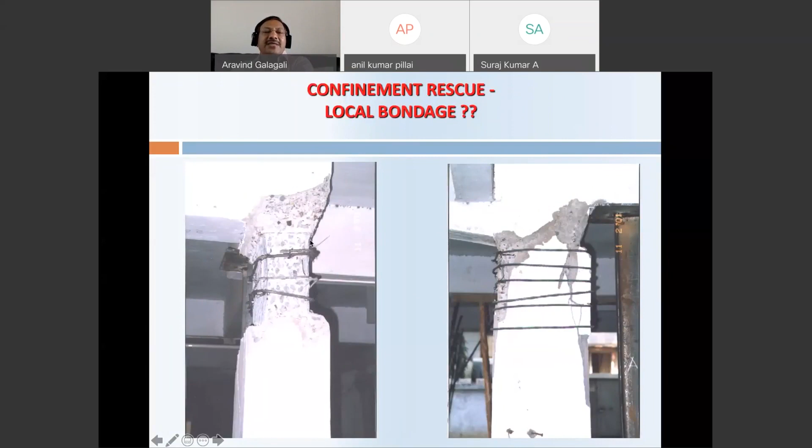What you need to learn is that repair is not what it appears to be here. This is not proper retrofitting or repair, but still we end up seeing these kinds of things, which we should learn to avoid.

Look at that, they are forgetting about the RCC structure and relying so much on the brick pier. They are adding support wherever a crack or distress was observed, abutting the existing structure. These are all things done very badly.

You can see the encasing on the existing structure, done with plaster, taking it like this. Some of these are directly taken from the floor, a ready floor, not even excavated. They have taken some supports directly resting on this, without really bothering how the load gets transmitted, or whether this encasing is useful or not.

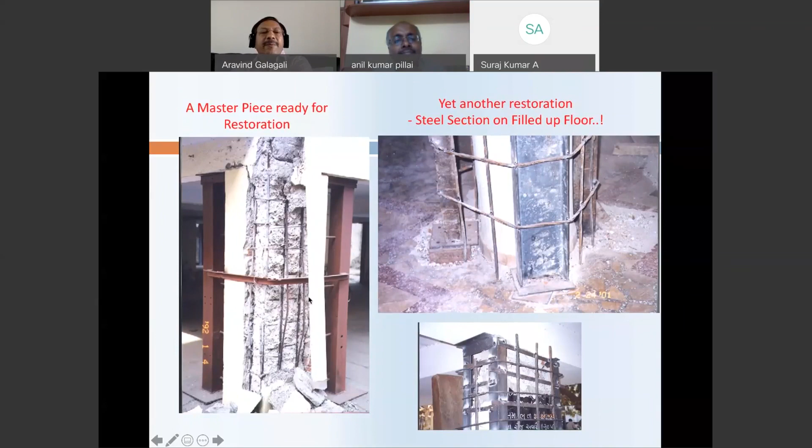Once the structure starts showing distress, we resort to repair, and what we learn is that bad repairing would not serve the purpose. These are different views of such repairing. Again the question is, who is responsible? Whether we as engineers are responsible, or somebody else. I leave that answer to you.

So, a few slides. What you need to learn is that failures happened, and lateral loads, particularly earthquakes, are only triggers. The failure is not due to the earthquake, but because of the failure of the building. Hence, earthquakes do not kill people, as the famous saying goes, which every one of us is aware of. Only unsafe structures kill people, and that is why you need to engineer properly.

I draw your attention to a few points you need to carry when you go back home. We have good earthquake codes, hence buildings are safe - no, not at all. Just having good earthquake codes and standards will not ensure safe buildings. Not at all, not true.

You need to understand plans and design. Some owners and people assume that if buildings are approved by municipal authorities, it is as good as approval for the safety of the building - not at all, you have to be very careful. And another assumption is that most of us feel earthquakes are rare, and that we are in a safe zone, because the zones are getting modified every now and then.

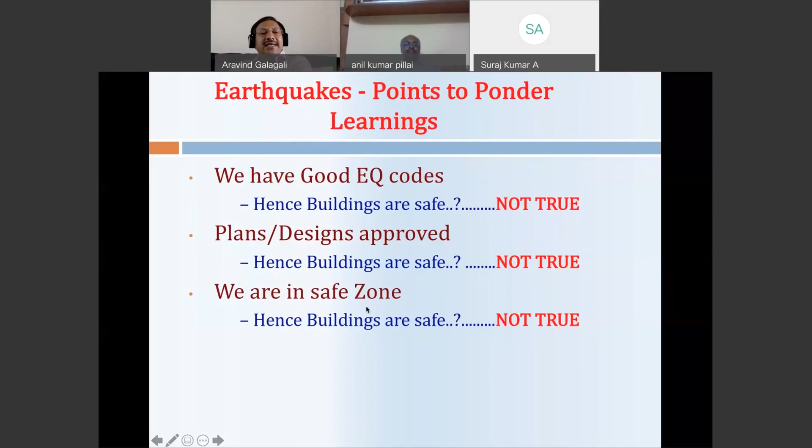Killari was earlier seismically non-active. After the Latur earthquake, the zones were changed again. So any part, when nature shows the happening of an earthquake, the zone gets modified. So don't be under the impression that we are in a safe zone and I can afford to ignore all this lecture. Thinking I can afford not to learn is not true anymore.

Small is beautiful, tall is dangerous - not always true. Earthquake knowledge is not meant for only college professors like me. No, it has to percolate down to the practicing engineers and the curriculum. Of course the universities and colleges are teaching earthquake design, but it has to come to the site. So you cannot afford to ignore it.

Earthquake resistant design - people feel it is costly. I don't think it's very costly, maybe around 8 to 10%. It may end up a little costlier than conventional design. But think, if you are saving 8 to 10% in the cost of the building, at what cost is that important? Are you ready to risk your life? That's the question you need to be answering.

Earthquakes are considered a rare phenomenon. People say it recurs once in 100 years, 500 years, 1000 years. No, it can happen anytime, any moment. It may happen tomorrow, we don't know.

Recall your memory from the last couple of weeks - there were some earthquakes in the Himalayan region, including Delhi. They felt some tremors, and there was news that this is a foreshock indicating an upcoming high magnitude earthquake. So you have to be very careful and design your building, detail your building, without ignoring the fact that earthquakes are considered a rare phenomenon.

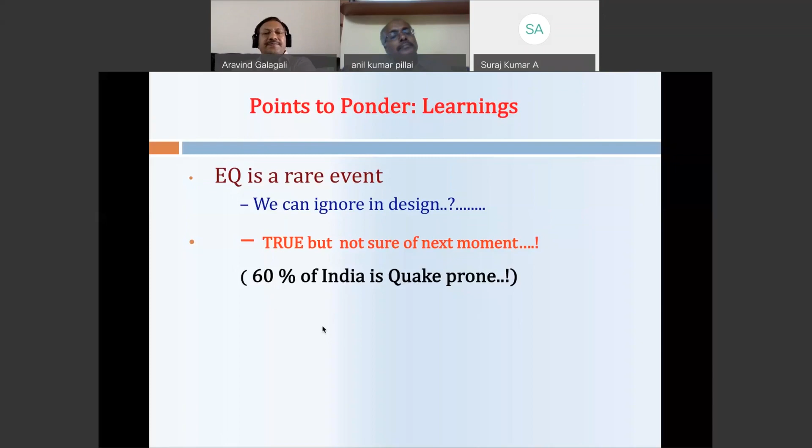You'll notice that 60% of the area is earthquake prone. And there are new kinds of loads - you need to be designing your building not necessarily only through the codes. There are natural hazards and their impact, new codes required - there are aircraft hitting buildings like the World Trade Center, light aircraft fragments, terrorist missile strikes, fires, and blasts due to terrorist activity, gas explosions, etc. These are the different kinds of areas we need to be focusing on.

Of course there are some good codes available for fires, and there are codes for blast. But there are still uncertainties in these kinds of blast loads, terrorist activities, and cyber attack. These are some of the areas we need to be looking at in the upcoming days.

So now, once we have all these things, why are failures still recurring in spite of all these studies? Because we are not learning, and youngsters don't have the luxury of learning from past failures, because there is no proper documentation. Everybody is scared of failures. Nobody wants to document the failure. Everybody would like to bury it below the ground, thinking they might get caught.

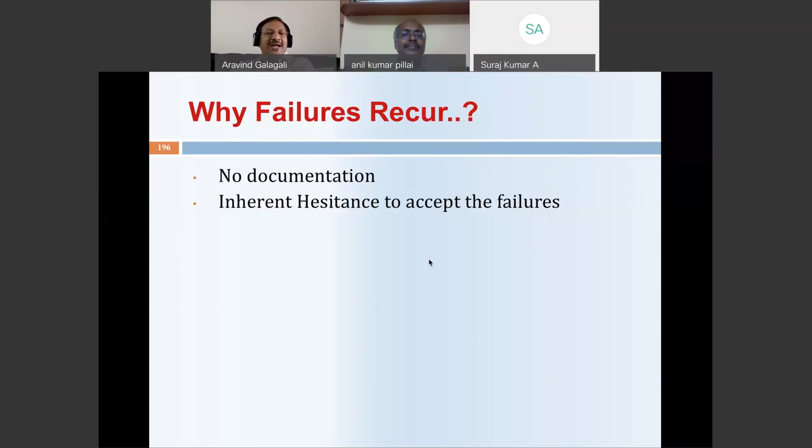People use thumb rules, there is misunderstanding, design deficiencies go unnoticed, and there's an attitude that structures can digest anything and everything. We have an attitude of 'chalega,' and all buildings survive in spite of our mistakes at various levels. We should come out of that, and only then can you prevent failures.

And the last point is no penalty. People talk about penalties. There are penalties - but what is the penalty, really?

Now, I showed you this sketch in the beginning, let's revisit it. You can see in the lower portion here, this is Hammurabi's code, 2000 years before BC, at the time of Babylonia. As all of you are aware, if a building built by a contractor fails, he should be put to death. And if it causes the death of the owner's son, then the son of the builder should be put to death. Look at the punishment that used to exist in the earlier days. But now we cannot have this kind of thing - at least codal and legal provisions need to be there.

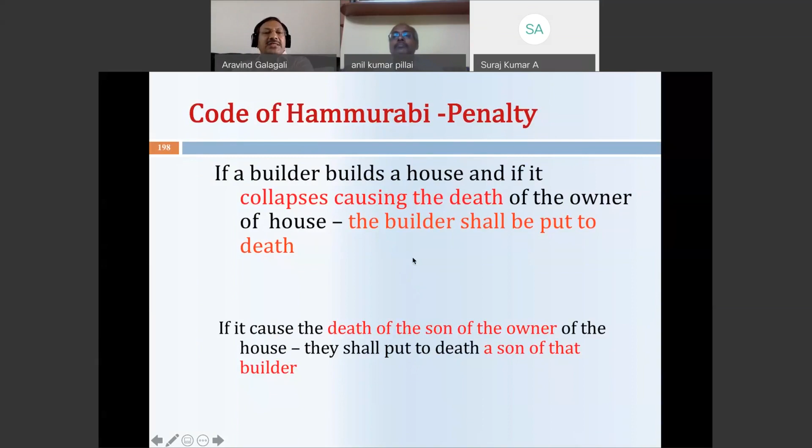And what happens in India? Big buildings collapse, killing 100 people, the owner runs away and files go missing. That's it - 8 persons arrested and released after a few days. Killings from illegal buildings - we don't have stringent rules in India, and officials ignore complaints. Many times these things get ignored by authorities - illegal towers, corporates and civic bodies, builders held for cash for crash, and they try to hush up the case by taking money, etc. These are some of the issues, and you can also see there are some side effects to learn from.

During all these failures, people and even Vastu practitioners started saying your building is not as per Vastu, and that is why they can correct your building through Vastu, etc. You should not fall prey to these side activities where people make hay while the sun shines for them under these crises. You have to be very aware about this misutilization of an event.

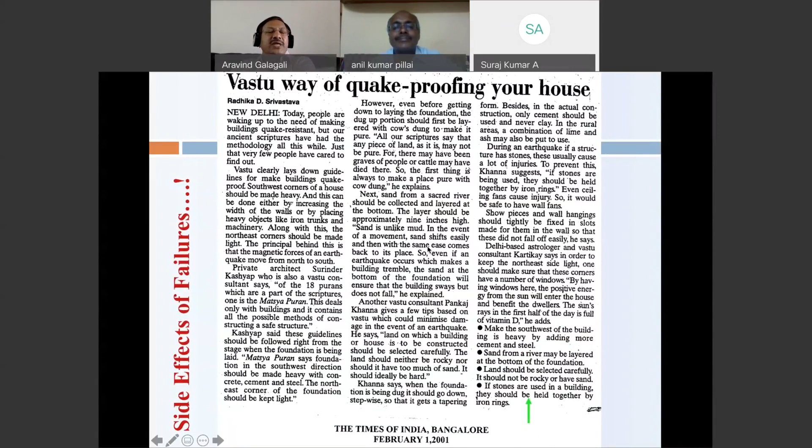But what you need to notice is quakes were there earlier, are there today, and nothing has changed, yet buildings are still failing in spite of the codes. Better standards do exist, but why? Now the failures are happening, and who is responsible? Again, the answer I leave to you. What are the lessons learned?

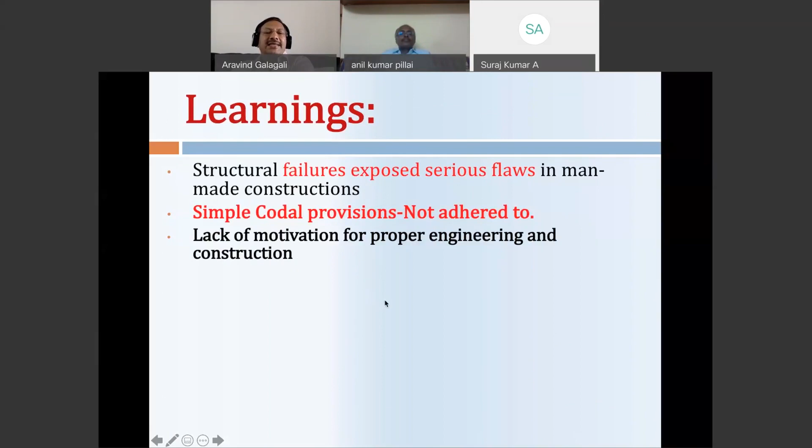Few things: structural failures expose the flaws in man-made structures, and we have ignored simple codal provisions. If we had followed this, probably we would have avoided a lot of failures and loss of life. There is no motivation for proper engineering and construction, and we don't have a proper monitoring mechanism by authority or from the engineering fraternity. The greatest cause is reluctance to learn from failure. There is a problem at all levels of design, construction, supervision, maintenance, etc. This exhibits a kind of system failure which we need to come out and learn from.

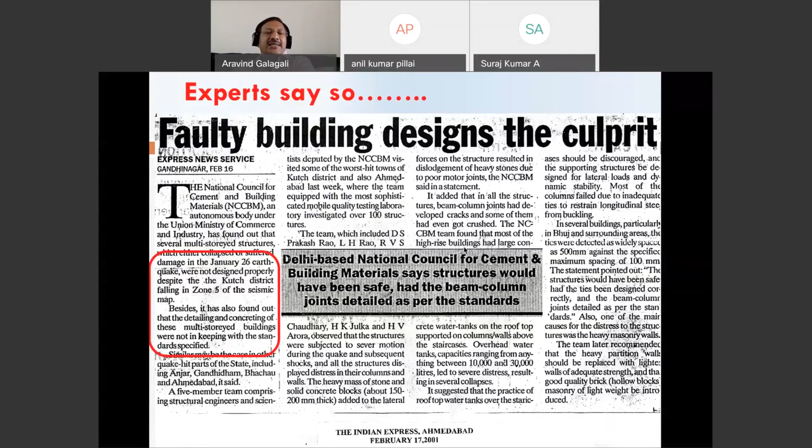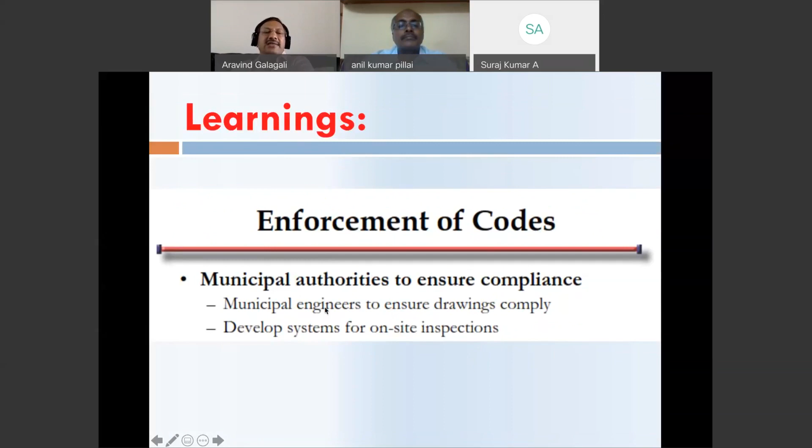What is the crisis ahead? As I said, a likely earthquake event has been forecasted by the National Disaster Management Authority. The other day, Professor Chandan Ghosh, who is also an earthquake expert, held a press meet in Delhi. You can see these foreshocks in Delhi found last week in May, which are an indication of upcoming things. Most construction is generally deficient, and the solution lies in the building, not in the earthquakes or other forces. So there must be proper enforcement of codes from everybody - engineering fraternity, designers, contractors, and the legal authority.

So what I need to conclude is that the failures are happening and they are consistent. Failures have happened before and are repeating even now. We can and we must and all should learn from this failure, then we can survive the failures. A word of caution at the closure: civil engineers, if they make a mistake, it is a disaster, unlike doctors, lawyers, and politicians, as you know.

Then what is the roadmap for safety ahead? Create awareness, a legal framework, technical competency at all levels, from students to practicing engineers to the supervising agency and approving agency. A professional ambience needs to be created, enforcement by local authorities, and of course R&D, and new building typologies are to be invented to resist all these likely failures.

So don't get disheartened looking at these failures. Have confidence, because we have done it again in spite of all this. Now we are in a position to learn, so don't lose hope, don't lose heart. We have a ray of hope, because we have recently created the Statue of Unity by L&T contractor, and this statue is the world's tallest statue, and it has brought pride to India and the engineering fraternity. So there is enough confidence, enough reason for us to take pride in our profession.

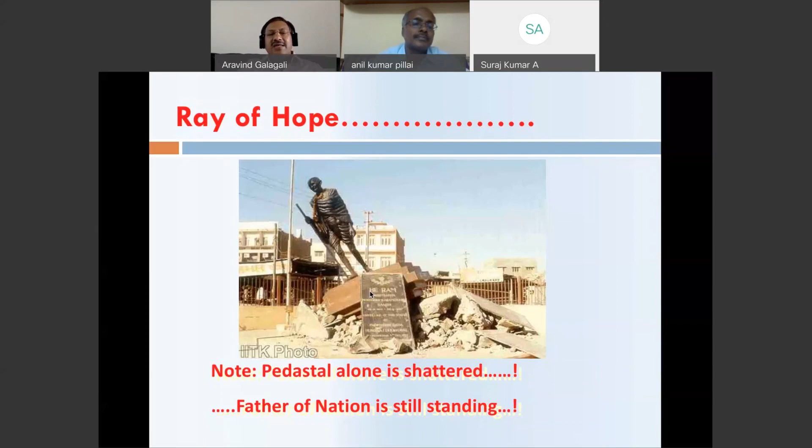Thank you, Anil, back to you, sir. Yeah, thank you so much, sir. It was really very interesting.

In fact, we did not notice that the time had exceeded because it was so interesting. And the case studies of the failure of structures, as you rightly pointed out, there is always a ray of hope, and we need to learn from those failures.

You had explained very clearly simple failures like development length, which many would not realize can create such a catastrophe. Not development length alone, but we need to ensure that it is implemented.

Another very important point you made was regarding lateral loads, wind load or earthquake load, and even waves. Sometimes when I go to the ocean, I can see how the waves behave differently at different times, the force that it has. So whenever we make a structure, one must not underestimate the effect of such lateral loads. That was really very interesting.